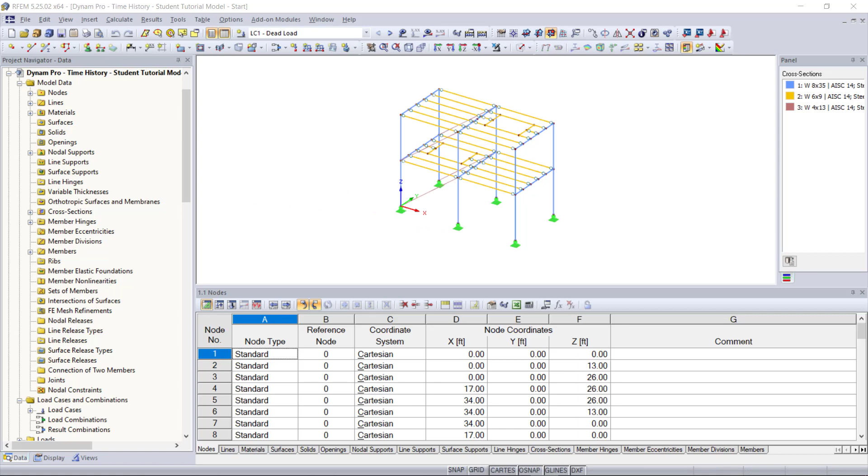So first thing you will see is I have a simple steel frame structure open here, and this is what we are going to be placing our oscillating machine on, and we will be adding in the horizontal and vertical force load cases as well.

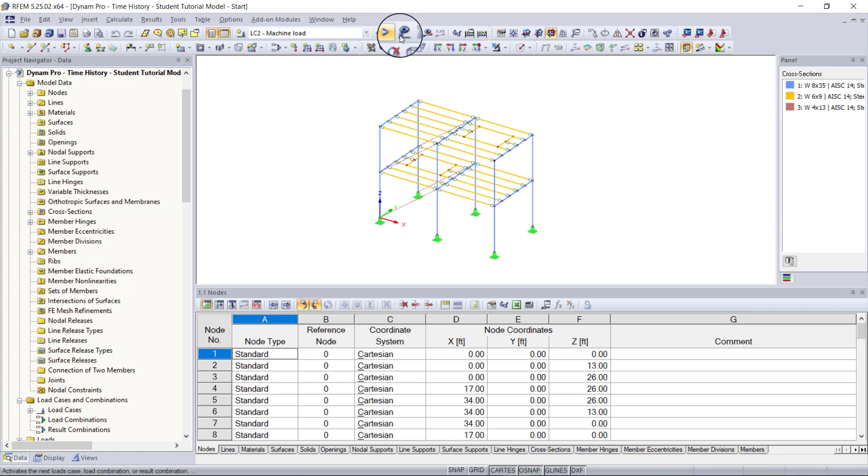So now I just want to show you the machine load. Right now we have the dead load open, but if I go to the machine load, you can see where the machine is placed within these openings here. And this is basically just a static force. So now what we need to do is add in the radial forces.

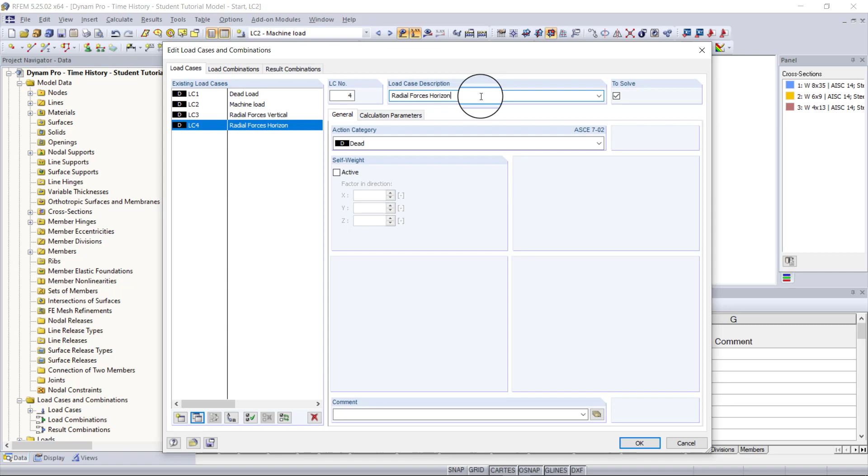So we need to go up here and create a new load case. The new load case dialog box will pop up, and this first radial force will be our radial forces in the vertical direction. And then we just need to create a copy of this and have a load case specifically for our radial forces in the horizontal direction. So we'll click OK. Now what we can do is we can create our vertical radial forces.

So what we need to do is go up to new member load. And then we can create our new member load. And this is going to be a force uniform and in the Z direction. And then we're going to enter a magnitude of 0.05 kip per feet. Click OK. And now we can just add in the forces along the perimeter of this opening where our machine is located.

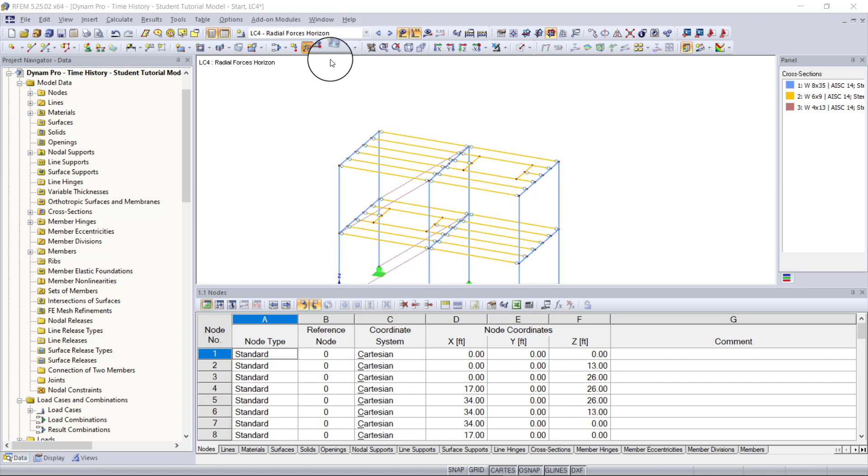And now all we need to do is do the same thing for our horizontal forces. So we'll go to the horizontal load case and create a new member load. And instead of being in the vertical direction, this is going to be in the X direction. And this is going to be the same magnitude, so 0.05 kip per feet.

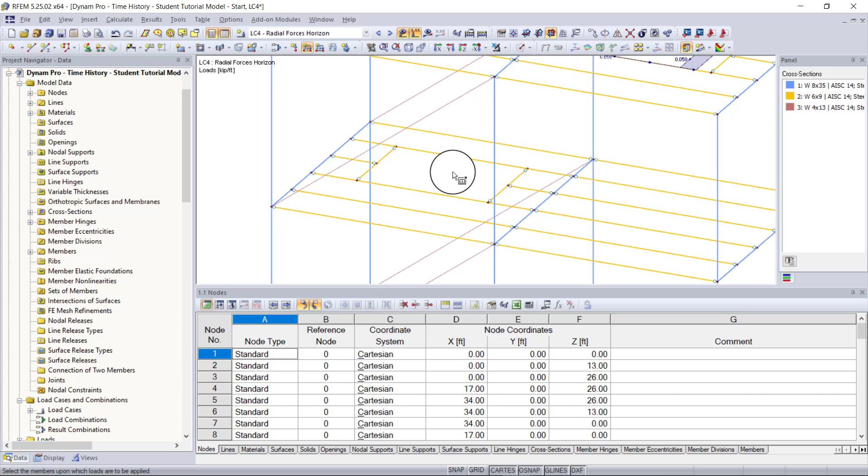And so now we just need to add in this load. And we can do the same thing for our opening down in the bottom here. And now we have both of our horizontal forces and our vertical forces.

So now that we have our forces for our machine, we can go into our project navigator on the left-hand side here and go down to add-on modules, and then we can double-click on RF-DYNAM Pro Dynamic Analysis. So now the first thing we want to do once we have the RF-DYNAM Pro add-on module open is we want to activate natural vibrations and our mass combinations.

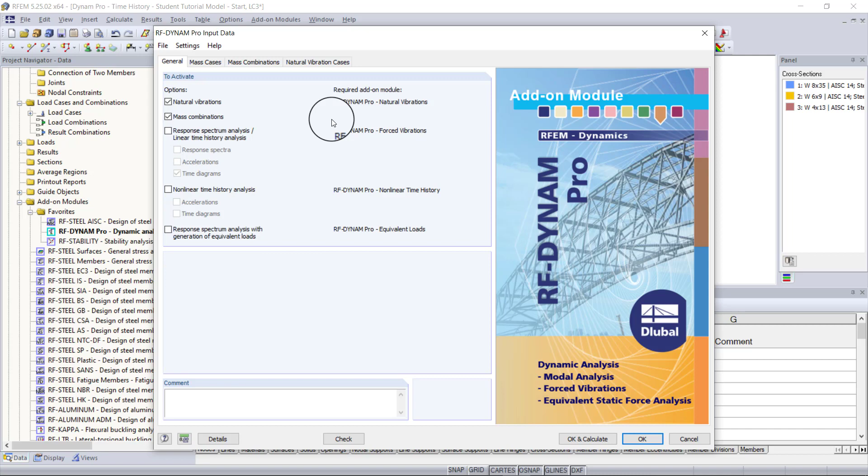I recommend going back and watching the tutorial videos on the natural vibrations, and these videos I will link below, and these just explain how to enter the input data and run results for natural vibrations. So a lot of this will make more sense, and I'm just going to briefly go over it now.

So under mass cases, we want to create two mass cases, one for our machine load and one for our dead load. So we'll just make this first mass case our dead load. And since we're already taking self-weight into account in RFEM, we're going to turn off self-weight. And then we're going to check off the option to take the force components from our LC1, our dead load case.

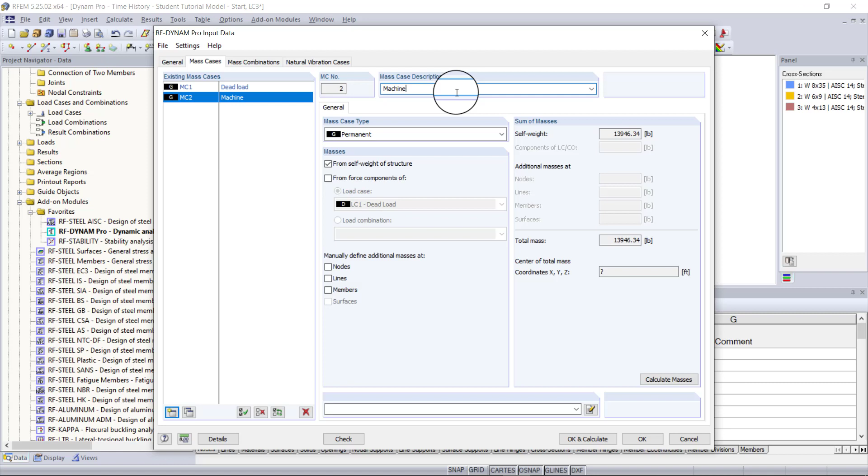And so now all we need to do is just make another mass case, and this one will be for the machine. And we're going to uncheck from self-weight structure and check from force components, and then we're going to choose our load case machine.

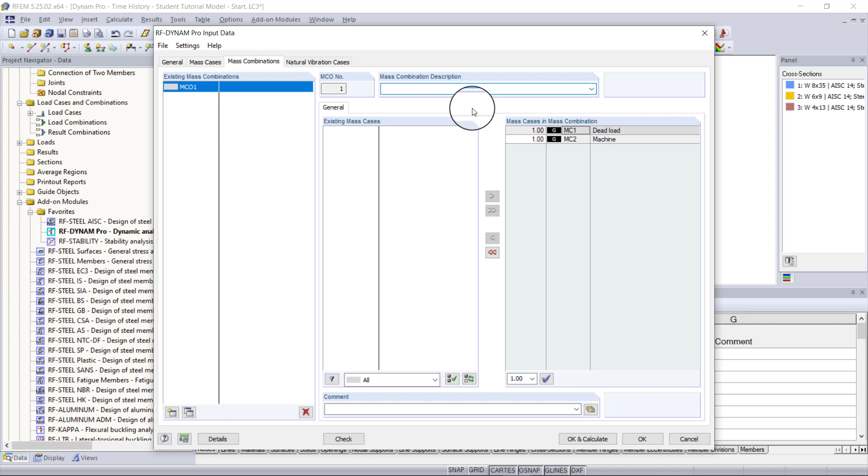Now under mass combinations, we just want to combine both our dead mass case and our machine mass case. So we can highlight both of these, move them over, and then we can just name this mass case 1 and leave it blank.

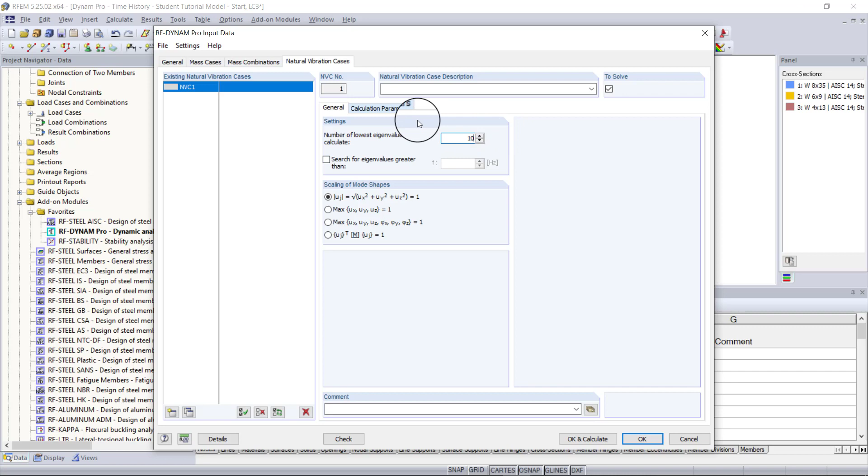Next, under our natural vibrations case tab here, under our general tab, we want to tell the program to run 10 eigenmodes. And then we can leave our scaling of mode shapes equation the same here. Then under calculation parameters, we want to choose the acting masses from our mass combination.

And then we are going to keep all three directions activated. And then we just want to keep our diagonal matrix and translational degrees of freedom. We'll keep the method for solving our eigenvalues as default as the Lanczos solver. And then we don't want to take any stiffness modifications into consideration. So now what we need to do is hit OK and calculate.

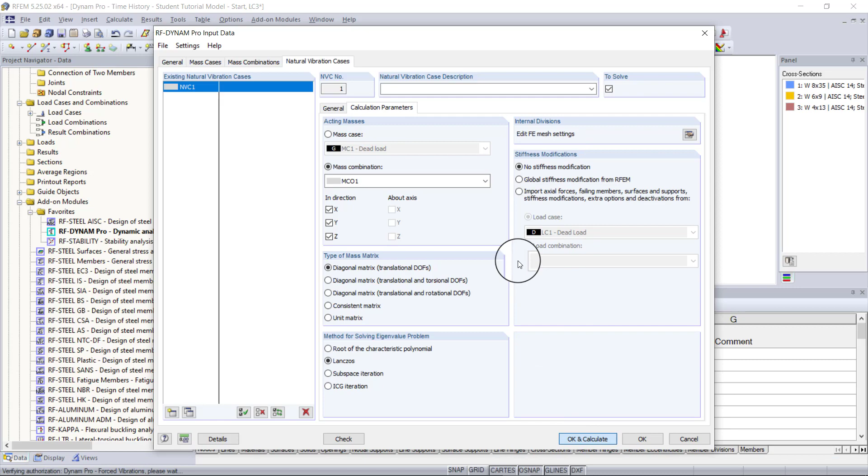And now back in RFEM, we can take a look at our results. So we want to go into table 5.7 and take a look at our effective modal mass factors and scroll down. And you can see that we have our total mass participation of 99% in the y direction and 69% in the x direction and 31% in the z direction.

Now it's not necessary to get 90% mass participation in each direction, so we don't really need to worry about that. We do need to find the modes with the greatest results in the x direction and the z direction because these are the directions of our loading. So if we go into the x column here, you can see that mode 7 is one of our most important mode shapes, and then in the z column you can see that mode 10 is our other most important mode shape.

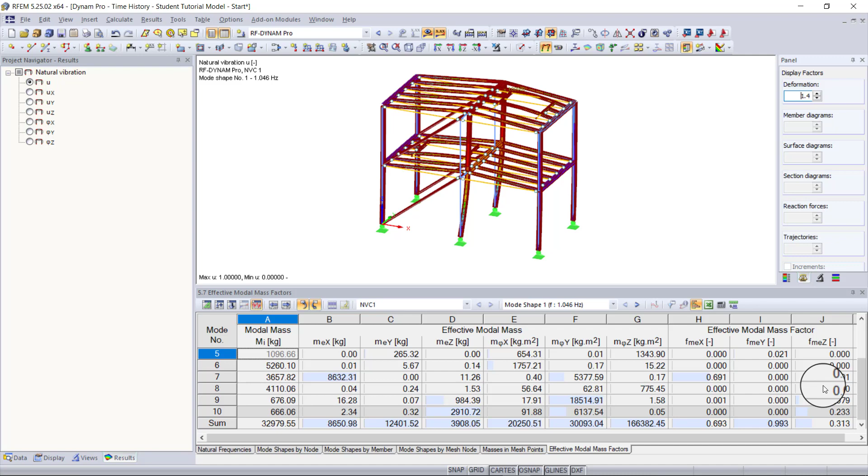And now we want to take a look at our natural frequencies as well, so we can see what our maximum natural frequency is. In mode 10 it is about 37 radians per second. And now we can go back into the RF-DYNAM Pro module and activate our response spectrum analysis or linear time history analysis module, forced vibrations, and then we would just want to activate our time diagrams.

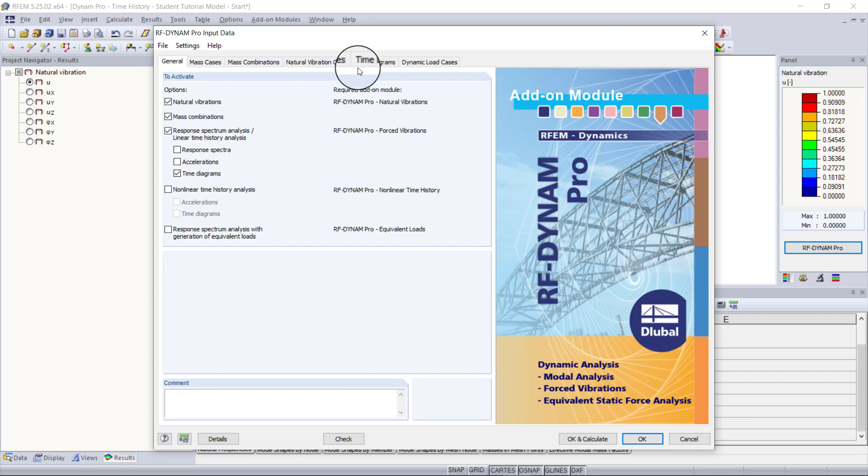So once I do that, you'll see a couple of tabs will appear, and in the time diagram tab, you will see a couple options listed here. So our options are either transient, periodic, or function. So transient is only for a linear time diagram, and so you have to enter your time steps manually, in seconds and then the multiplier. And you can import and export this from Excel.

Then periodic is the option we will be using for today. And then a function, as you may guess, is you can enter a function and you can have it calculate your time steps for you based on the function and the step size you choose, along with the maximum time.

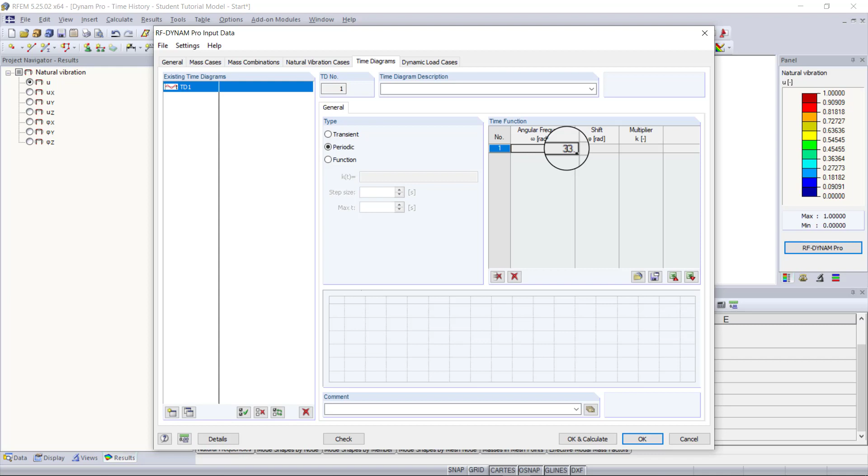So like I said, we're going to be using periodic, and under this option, we want to enter our angular frequency of the machine. And for this example today, we're going to assume that our machine runs at 5.33 hertz or 33.51 radians per second. For the shift, we're going to keep this as 0. And then for the multiplier, we're going to keep this as 1. And then once I hit enter, you'll see that the program creates a sine function based on the angular frequency entered.

And for this time diagram, this is going to be our vertical component. And so at time 0, it's going to have 0 impact, or there will be 0 forces. And then at time 0.047 seconds, we will have an impact or full force of our loading, so 1, and so this will keep going based on this sine curve.

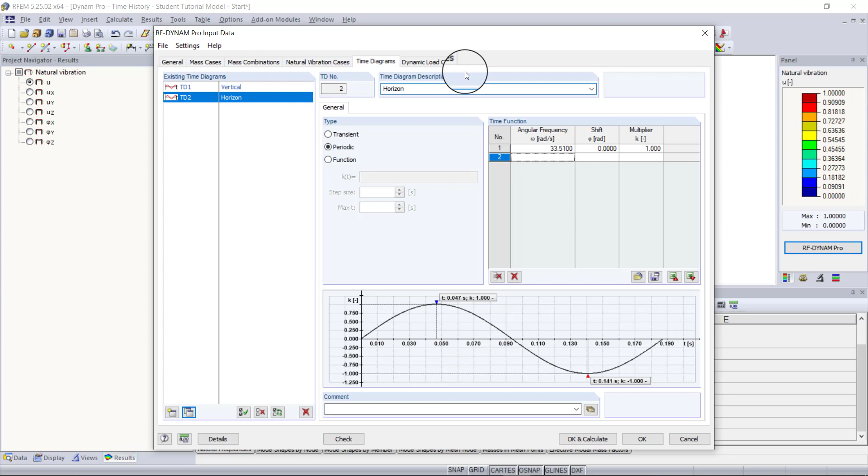So now we have to enter the time diagram that's similar but not the same, so we want to make one copy of this, and this time diagram is going to be for our horizontal components. We'll keep it as periodic, and then all we need to do is shift this time diagram by a value of half of pi, so this equals 1.5708. And if I hit enter, now you'll see that our time diagram has shifted.

And now at time 0, we have full force of a multiplier of 1. And then at time 0.047 seconds, we have no force at all. And so this is how we're going to simulate the radial forces from our machine that's oscillating, with our two vertical and horizontal components here.

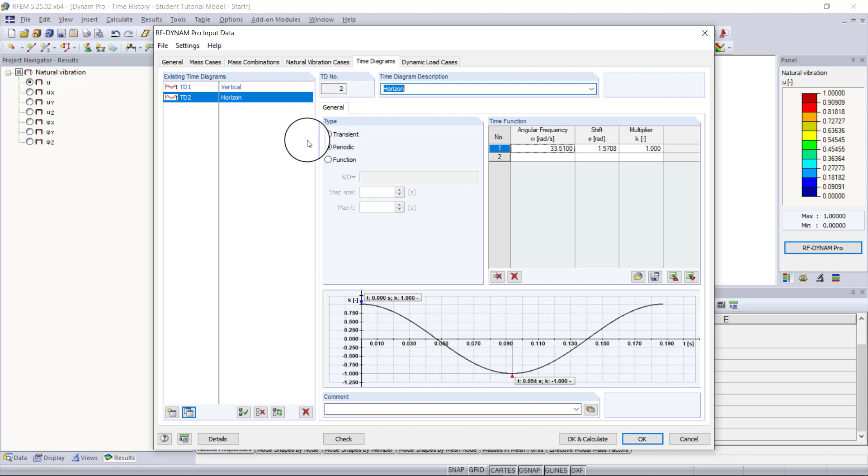So now what we have to do is combine our time diagram with the loads. So we need to go to our dynamic load cases tab, and you can see we only have the time history analysis of time diagrams activated here, because the only module that we activated under our general tab is time diagrams. So everything else will be grayed out.

And then we're going to be using the linear implicit Newmark analysis, and this is recommended in most cases because it provides more precise and better results, whereas the linear modal analysis should only really be used for small structures like a cantilever, for example.

So then under the next tab, time history analysis, here we have to combine the load cases with the time diagram. So for our first load case here, we're going to choose our vertical radial forces, and then we're going to match that up with our vertical time diagram. And then for the second load case, we're going to choose radial forces horizontal, and we're going to match that up with our horizontal time diagram.

When it comes to time steps and maximum time, we want to change to something smaller, from 0.1 seconds to something like 0.01 seconds. And you want to think of this kind of like FE mesh, because you'll see later how this can affect the accuracy of your results. And then the next thing we want to enter is our maximum time, and we'll enter 15 seconds for this.

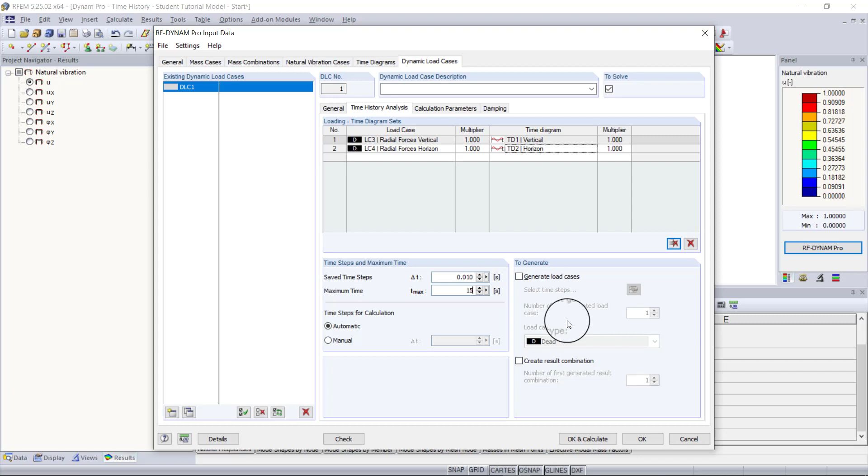You can then use the generate settings over here to generate load cases and result combinations. We don't need this right now, but if you wanted to see the results later and combine them with other static loads so you can do some design work, you can do that here. This is just something that is handy if you wanted to mix static loads with the loads generated from this time diagram. The next tab we want to go into is our calculation parameters.

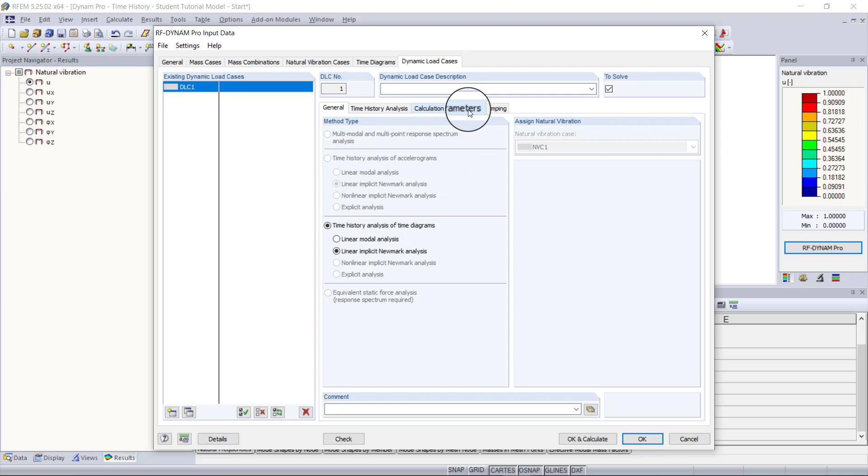And so here we want to do the same input process just like our natural vibrations analysis. This is because the linear implicit Newmark analysis does not use our natural vibrations case 1 that we created. And you can see if I go back to general that this option to choose it is grayed out. But if we chose the linear modal analysis, we could choose this from here. So what we need to do under calculation parameters is basically just set the same parameters as we did for our natural vibrations case 1.

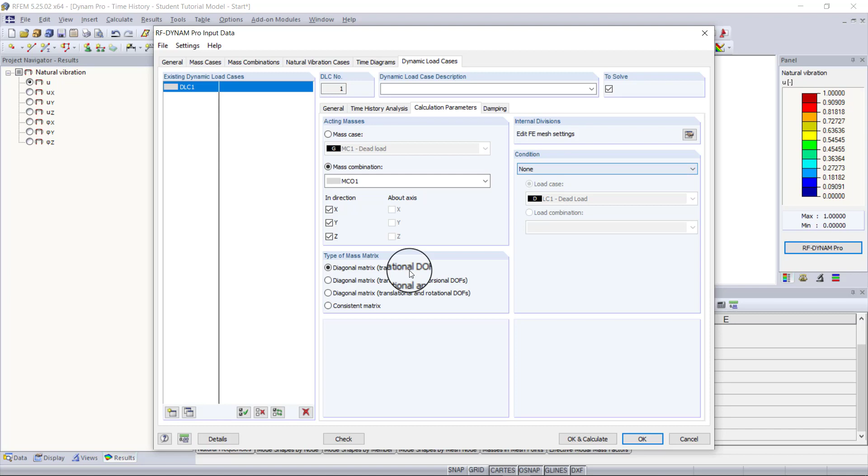And so we can choose our mass combination and we can choose in all directions. And then our type of mass matrix will just be in the translational degrees of freedom. Then when it comes to the condition, we're not going to use any conditions. Then the last tab we need to go through is damping. So these are the last major settings that we need to look at.

And what we need to do here is just enter our damping coefficients for Rayleigh damping. We can't use Lehr's damping for our Newmark analysis. And so what we can do is go into this tool here that converts Lehr's damping into Rayleigh damping. And this is the reason why we ran our natural vibrations analysis, because we needed to find the dominant mode shapes and take the natural frequencies from these.

So we can click on this small tool here and we can enter our frequencies from the most important mode shapes, which were 7 and 10. So 7 was for the X direction, and that was 33.67 radians per second. And then since we're using a steel structure, we'll just assume that for steel, the damping coefficient is going to be 0.02

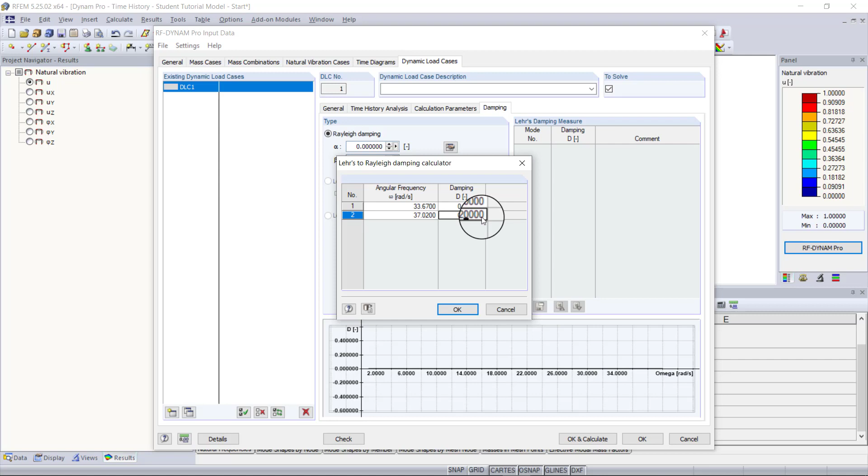or 2%. And then our other mode shape was in the Z direction, and that was mode shape 10. And we had a frequency of 37.02 radians per second. And then again, we're just going to enter 0.02 for our damping coefficient. So now we can click OK, and you can see that our coefficients, alpha and beta for Rayleigh damping, were calculated automatically. And then you'll see the function will appear down below, and those dominant frequencies we entered are damped by a factor of 2%.

So now basically those were the last pieces of data that we needed to enter to complete the input data for our linear time history analysis. So now all we need to do is hit OK and calculate, and then we will see the results. And this is the end of part 1.